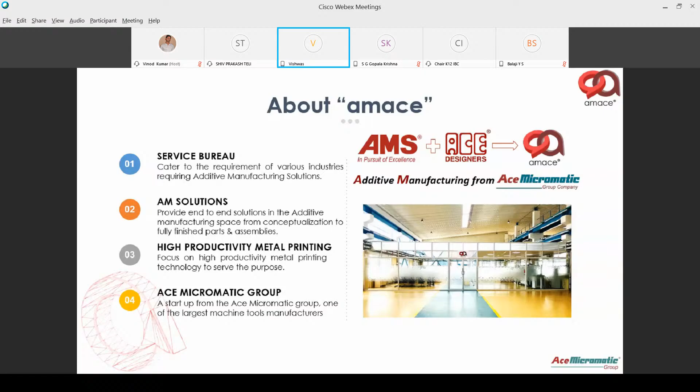Next. So basically, we have seen different types of traditional manufacturing. Just a quick intro on that. We know mostly parts that we use, we feel we see around us are all either casted through a casting process or formed using a press, as you can see there, joined using a welding process, as you've seen, and finally taken up for machining. So this is normally how traditionally any metallic object is done, broadly classified into.

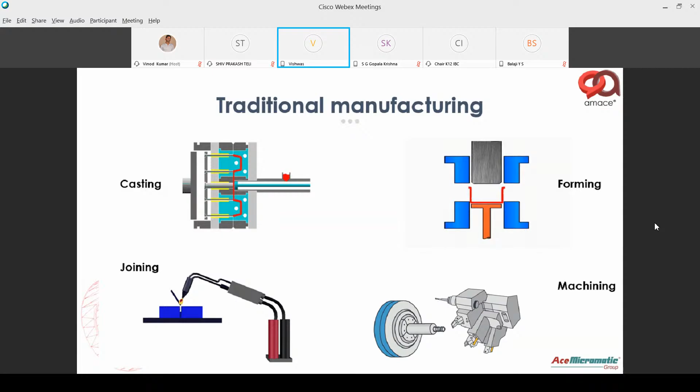But going ahead, in the machining, we have aspects such as turning, milling, drilling, tapping. These are all different processes in subtractive manufacturing. So in the conventional manufacturing process, we call this subtractive manufacturing. I'm sure a lot of us from the mechanical engineering stream would have studied this, used these machines, and actually felt the process. So bulk of the manufacturing today, be it any automotive part, which is especially important in our transmission and movement, are all subjected to these subtractive manufacturing processes where you have material being removed.

So why is it called subtractive? Because material is removed from an existing state. It could be from a casted part or a forged part or even a solid block that is machined. So finally you remove material to get your final part. So that's why it's called subtractive manufacturing.

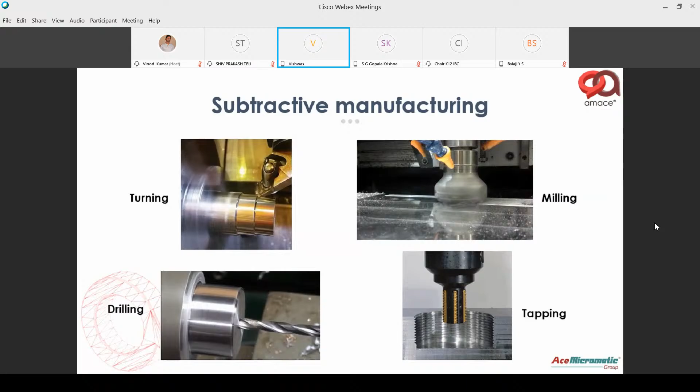On the contrary, additive manufacturing is basically a process where you put material together. So what you see here is a small comparison where in subtractive, you start from a solid block and remove a whole lot of material, and then you finally get your final part. Whereas in additive, you start from a material which is fused either through a heat source or laser or electron beam or a binder. We'll see some of those processes where you basically put the material together just enough to get your final part with very minimum wastage. So that way, this is a very green process. It's a very natural way of doing things.

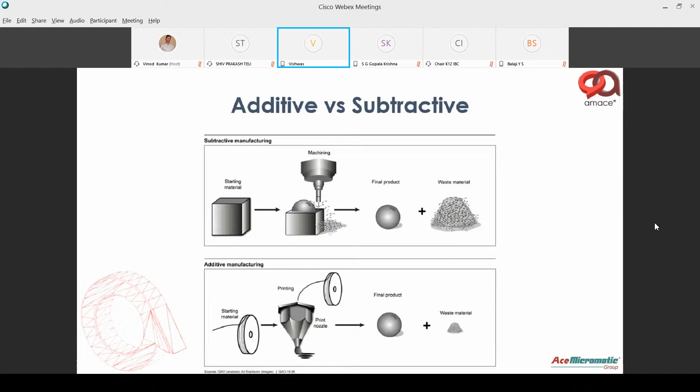Next. So this is an interesting curve which again substantiates the comparison between additive and subtractive. Focus on the x and y axis here. On the x axis we have complexity, and on the y axis we have cost.

So the green line here shows how we would go about costing a part that has to be made conventionally. Conventionally, when the complexity of a part goes up, the cost shoots up drastically. If your part needs a fourth axis machine or a 5-axis machine, the cost shoots up dramatically. Because of this, most designers end up simplifying their part design so complexity reduces. They break the large complex part into smaller pieces that could be machined or manufactured using simpler processes. So this is how conventionally parts are done.

Whereas with 3D printing, complexity is pretty much free, meaning irrespective of how complex a part is, the cost remains the same. The only aspects that decide the cost are the material, the amount of material that goes in, and the volume of the part being printed. So irrespective of complexity, the cost remains the same. You could have a very complex part weighing X grams that's printed, or a simple solid block of X grams printed, and the cost would remain the same.

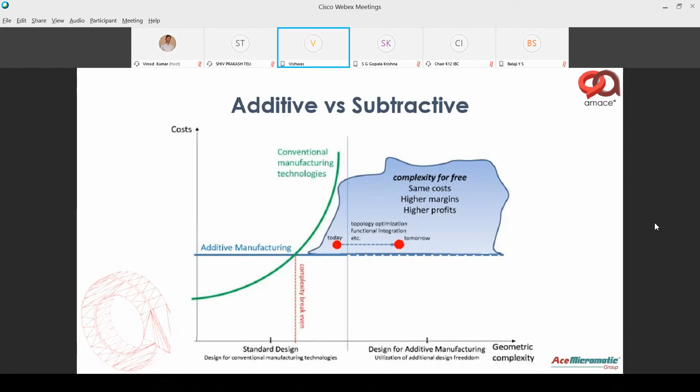So what you see next are the advantages of additive manufacturing. Most of the current manufacturing route is subtractive in nature - whatever we mentioned earlier, automotive, aerospace, medical, any aspect of manufacturing uses subtractive routes. But the natural way of creating any object is the additive way, be it a tree, a bird, an animal, or the human body - all of them are made the additive way. We don't get an arm or a leg that's screwed into us or joined as a separate member and then put together. We're formed the additive way, as a monolith structure, and then we grow internally.

Another advantage is simplified product design. 3D printing allows you to make product design very simple. When you conventionally design any part for a specific application, you always have a constraint from the manufacturing side - either from a casting guy or a forging person telling you this cannot be done, or from a machining person saying I cannot insert a tool to do a hole or mill it at a specific angle, so you'll have to break it into multiple pieces. Or even assembly constraints, because you cannot assemble it together in its current complex state.

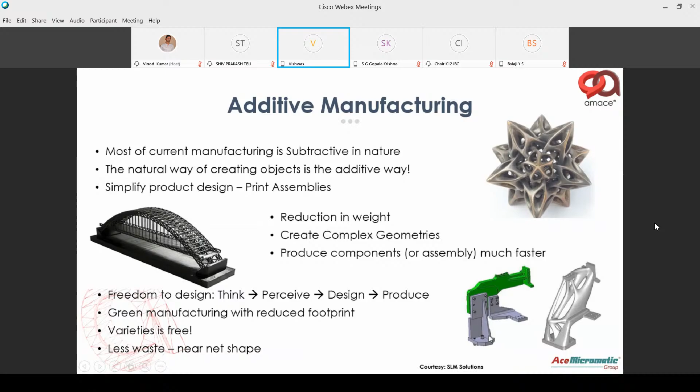Whereas with 3D printing, you can print assemblies, which means you're not worried about how the input processes work - you can directly print assemblies. We'll be looking at some of those examples going ahead. So that's a big advantage.

So you're basically doing something called mass customization. When we say mass customization, you're producing something in high volumes, but they're all customized parts, not necessarily high volumes of identical parts. We all know mass production. Now mass production has become mass customization, wherein you're 3D printing for every specific patient individually, but in high volume. So volumes will remain, but they're all going to be customized.

Similarly, you have prosthetics, orthopedic implants, various medical implants that are happening. Then, of course, what used to happen conventionally in 3D printing was rapid prototyping, where you'd want to get something done in small plastic mainly for visualization purposes. That is happening, that you've seen and known, most of us know about that.

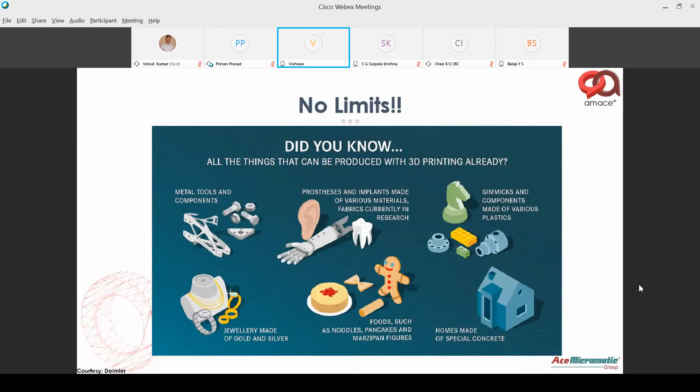Jewelry is another interesting field because you can print them really light. Lightweighting is one of the key applications of 3D printing. So a lot of interesting people have started printing gold and other exotic material where they make it look big and bulky, but it's actually hollow or lightweight from inside. And they can also be made with a very intricate design. So this way, different applications.

Now, going ahead, one of the biggest subjects in additive manufacturing is DFAM. We call it design for additive manufacturing. We've all learned about design for manufacturing, but this is design for additive manufacturing, wherein the subject deals with a lot of optimization, be it weight optimization or topology optimization. It basically means taking a part which you'd want to be printing, where we do a lot of design changes, modify it to make sure you reduce the weight, reduce the unwanted redundant aspects of the part, and make it just enough and suitable for 3D printing.

We'll have a look at some examples going ahead, but another advantage is part consolidation. I explained that today people are 3D printing consolidated parts, which means you could have multiple pieces of individual parts which are all put together as a single assembly and then printed together. Now, this also helps you in direct part replacement, which means where you'd have spare parts and aspects like that, you can reproduce them very quickly and then replace them, which is a big application today.

And of course, we've always known rapid prototyping, where low volumes of prototyping need to be done before any development of maybe an automobile or an aircraft. All of that can be prototyped using 3D printing, which is a key advantage today.

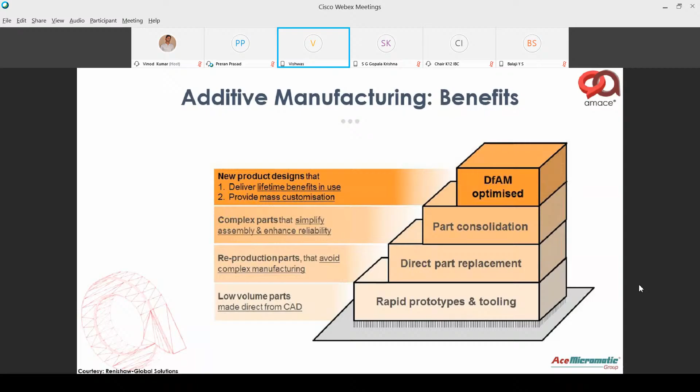Going ahead, normally we classify additive manufacturing or suitability for additive manufacturing based on quantity. Now take an example: say you have a part which is very low volume, say less than 250 — that's just a figure there, but it could be any number based on application. So if it's a low volume and the geometry is machinable, then normally people go for a CNC route. But if the geometry is not machinable, then we suggest just printing those parts because your volumes are too low to even die cast or injection mold, based on what part you're making.

Now, whereas if your parts are high in numbers, where you want high volumes of parts manufactured, and if your geometry is machinable, then you'd go for an investment casting or die casting traditional route. But if your geometry is not machinable, then we'd suggest printing those patterns — your investment casting patterns can be printed using 3D printing, where you could print aluminum or any other material and use them as patterns, so you don't have to actually go and machine it, and use it directly for making your casting.

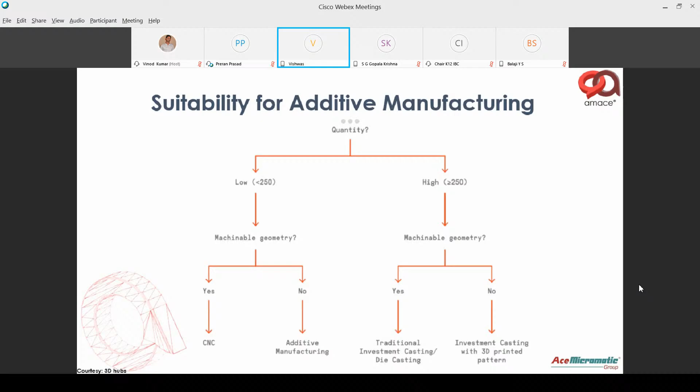So that's basically how we classify from a volume perspective. Going ahead, these are different technologies. We touched upon that. Today we have people printing polymers, sand, metal, ceramics, wax, Kevlar, graphite. People are printing all sorts of exotic materials today for industrial applications, suiting different requirements.

So basically, some of the broader classifications are listed below, say for example based on durability, based on surface finish, based on detailing required for the part, and then application. So the technologies basically show that if you move from a lower durability to a higher durability, a smoother surface finish to a rougher surface finish.

These are all different names given on the right. You can see stereolithography, polymer jetting, binder jetting, fused deposition, laser melting. Some of them are for polymer material, some for metal, some for ceramics, some for a combination today. These are different technologies, and they've been evolving over the past 20, 30 years, and some of them are fairly new, very new.

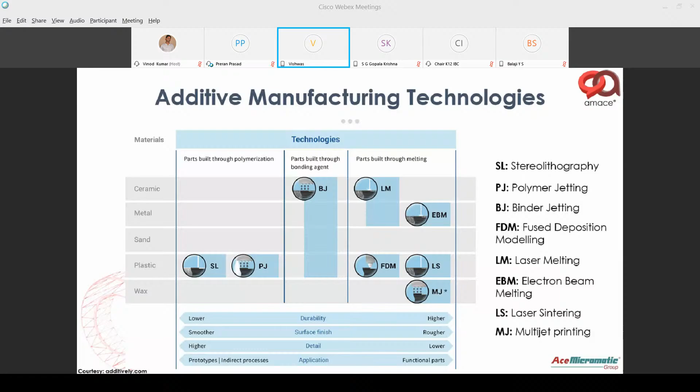So going ahead, you can see the whole process flow of additive manufacturing. What you see on the left side is it all starts with a 3D model. How does this work? So you have a 3D model - anything that has a 3D model, or that can be converted into one, can be 3D printed.

From a 3D model, we go ahead and convert it into a triangulation file. Basically, an STL file is a triangulation file - any part is broken down into triangles from a surface perspective, and then this file is sliced into multiple layers. Each layer's information is passed on to the machine, and each layer is laid one on top of the other to get your final part. That's basically how the whole process works.

Now you can see that happening there. In the fourth step, you have the whole printing process going on. Once that's done, there's a finishing process which we call post-processing. Here we get the end part based on some application, through heat treatment, machining, or other surface treatment processes that we follow to finish the part and give it the final shape and form we want.

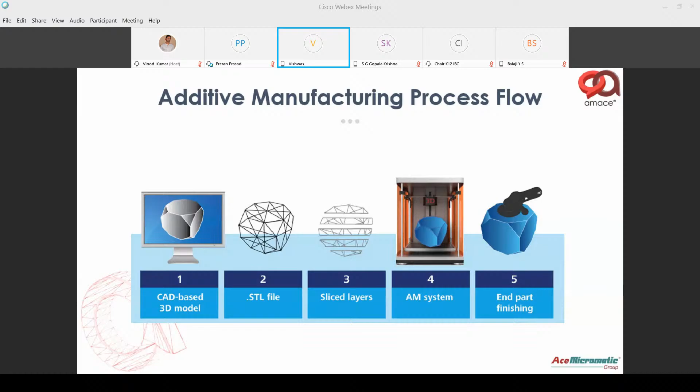So, interestingly, another aspect which is changing in the market is product life cycle. What used to take about 5, 6, 7 years for product development is now shrinking into 1 or 2 years. Take an example of an automobile - a car like the Swift took about 7 or 8 years in its first generation before it underwent a change or modification.

Now it's all happening in about 3 or 4 years. The second version of the Swift came down to about 3 or 4 years, and the next version will go down even further, maybe about 2 years. So people are getting restless - every product is getting obsolete very quickly, be it mobile phones or televisions, because technology is evolving so fast.

Now, one technology really supporting this well is 3D printing, because what would otherwise take many weeks or months to make your first casting part can be printed in a few hours. We've printed parts for automobile manufacturers where otherwise they would have had to cast it in about 2 or 3 months - instead it's all 3D printed in about 2 or 3 weeks, and offered to them for testing. Right now, as we speak, a lot of parts undergoing change are going through this process. In fact, a lot of BS4 to BS6 conversion happened through the 3D printing route for those initial batches when they wanted to test and see the functioning.

So that way, additive manufacturing is the most suitable process for supporting this technology.

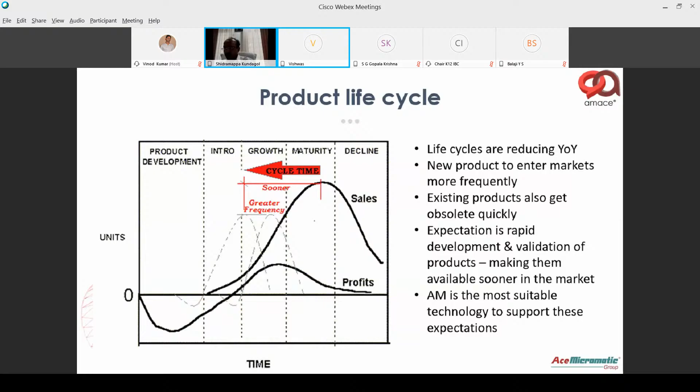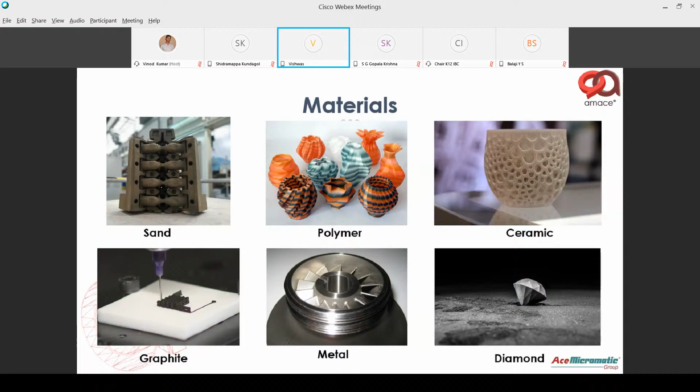We'll focus our presentation going ahead a little on metals, so you'll see a little more cases of metals going ahead. Next, so you can see this here.

This is a technology called laser powder bed fusion. If you actually see, most of the metals being 3D printed today use this powder bed fusion technology. What happens here is material in the form of metal powder is laid on a plate, as you can see on the top image being pointed. It's laid like this, and then you have a laser which comes and melts that powder, and it fuses to the previous layer. So the previously melted part is fused to the new layer of powder.

As every layer is completed, the platform goes down on which this is printed, and the next layer of powder is laid. On the left side, the blue image shows you multiple layers of powder which were fused to form the part, sitting in the middle of a big cake of powder. This layer of powder could be anywhere between 30 to 100 microns thick to get your part, which is finally almost finished.

So this is basically how it happens. The power source could be either laser or electron beam. What you see on top is basically a laser beam which is deflected by a mirror - a 2-axis mirror which deflects the laser beam very selectively and accurately at a specific spot, and then melts the powder and fuses it to the previous layer.

This is very similar to a micro welding process, so any material that can be welded can be 3D printed. Imagine you have heard of laser welding - this is very similar to that, but happening at a micron level, very fine level. That way you get your accurate part with very few defects on it.

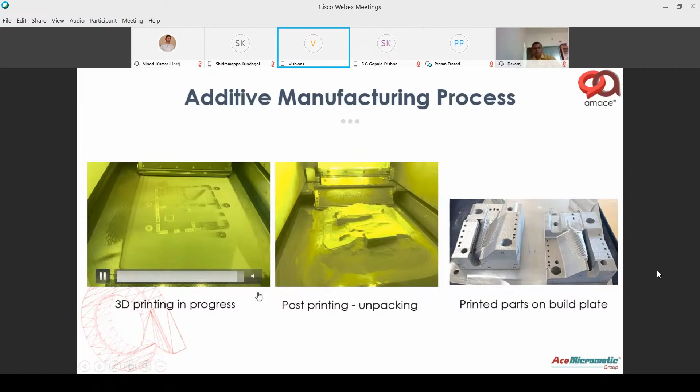Going ahead, next. In this whole process, what you've seen in the metal 3D printing process, we discussed powder bed fusion, PBF. As I explained, about 75% of the printing happening in metal uses the powder bed fusion technology.

The other one is DED, which is direct energy deposition or direct metal deposition. In this case, a metal is fused through a coaxial laser and metal jet. A powder metal is sprayed using a nozzle onto a plate. Basically, this is similar to 5-axis machining - if you've seen 5-axis machining, you can imagine instead of the spindle which is cutting material, you have a nozzled body which is spraying metal and laser surrounding it.

So basically, the laser melts the powder wherever it's being sprayed on. This way you can print parts of any shape and size as required in this whole technology.

And the third one is the new one, called binder jetting, which I explained some time back. It's an interesting field where you have a binder, which is more like a glue, sprayed on selectively in areas where you'd want the bonding to happen. Then the next layer of powder is laid, and again the binder is sprayed.

So at the end of the whole process, you get a big cake of a part which is in its green stage, just glued together, and that will have to be subjected to a sintering process. Basically, it's put into an oven which will melt the whole part and fuse them together. Then finally a debinding process removes the binder, and then you have your final part ready.

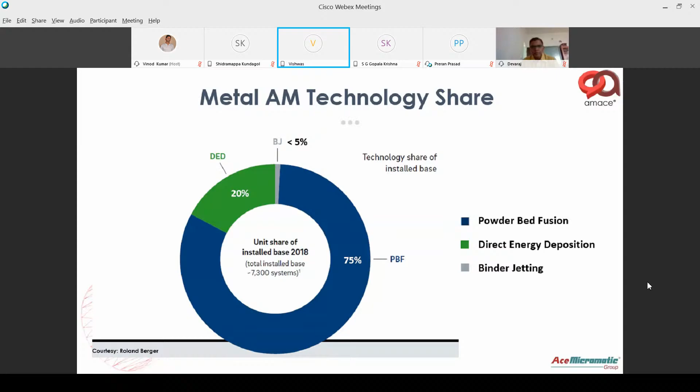This is one of the newer technologies, which has come in the past 5-6 years, but it's at a very nascent stage. This slide shows you about surface finish.

On the left side you see a very coarse thickness, imagine an 80 micron layer thickness. When you want a part printed fast, we end up choosing a coarse thickness. This has the advantage of printing faster, so you get your final part much sooner, and it's an economical approach.

But the problem is the surface finish is very poor. You don't get a very finished part, so you'll have to probably subject it to some post-processing or finishing machining.

On the right side, you see a thin layer thickness, say 30 micron. Here the printing is slow, but it's almost ready to use in its final shape. It may be a little more expensive, because you'll be taking longer to print, and time is what decides the cost.

But you also have the option of printing it in hybrid, shown in the middle, where you have coarser areas that don't need too much finesse. You could print those in larger thickness, and then when you have finer aspects, you can print in lower thickness.

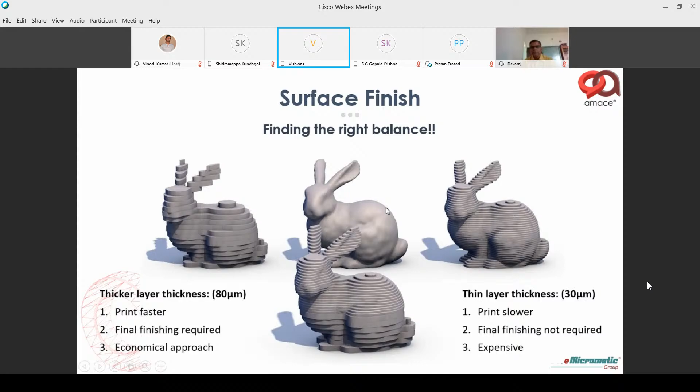Eventually you'd want a surface finish as shown in the image at the back, a smoother surface finish, achievable through post-processing. So it's all about finding the right balance.

So we explained about design for additive manufacturing. We'll quickly run through this. Basically, this is a science where, as designers, we can sit and understand, apply a lot of AM techniques to find out how to make parts more suitable for its application.

You can create intricate shapes and produce them with lighter material. If people who've used ANSYS, which you'd use to simulate weight optimization, ask based on certain conditions, ANSYS to throw out the most optimum structure, it normally gives a structure which is in a bionic form, very weird in shape and size.

So what we end up doing is adding a lot of material to make it suitable for manufacturing. Though it gives out a very weird shape and structure, we end up adding a lot of redundant material, hence over-designing, to make it manufacturable.

Whereas with 3D printing, we have an advantage, as you can see in the images in between. A lot of analysis is done. On the extreme end, you have a solid block of a bracket which is designed, going through multiple rounds of iterations of analysis and simulation, which finally tells you that you need material only in these areas for the kind of strength and load you've actually asked for.

That ends up deciding how the shape and size should be, and that can be directly taken onto a 3D printer and printed and used for its final application. This way you save not only material but also a whole lot of time in manufacturing compared to the conventional way. So there are a lot of advantages, and design for additive manufacturing is a very important subject.

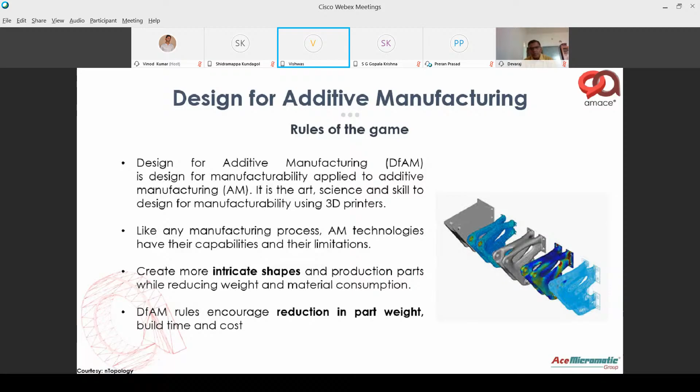Fantastic softwares are being made available. Almost all software manufacturers today are gearing up for this, where they're taking you from seamless integration, design, simulation, analysis, manufacturing. All these are being done on a single platform, which earlier used to be done on different tools. Going ahead, you'll see some more examples of DFAM.

You can see this part here. This was basically a bracket for Airbus. An existing part used to be big and bulky like this, still an aerospace part which is quite light conventionally compared. When you did a topology optimization, you ended up getting a part which is seen on the right side. So this is actually a part which has been put to test and been used.

So where you apply topology optimization, one of the biggest areas of AM where applications being used is aerospace. You can see some of the advantages are very little wastage. You have a lot of cost saving when you have exotic material like titanium and others which cost a lot of money. If you've seen aerospace parts, when you print, about 95% of the material is scooped out, and finally you get a very lightweight structure.

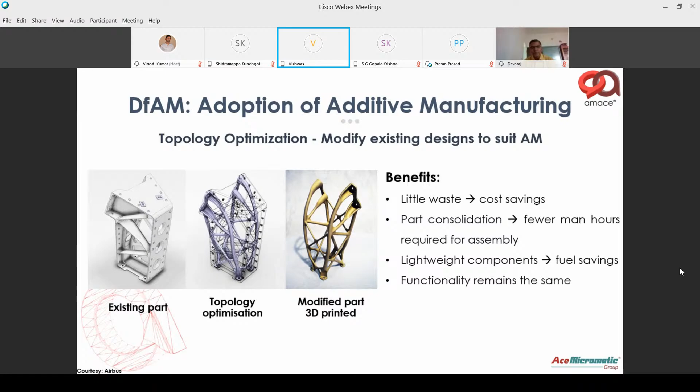So you put a solid block and get a very thin structure which comes out. Here you can print that directly. That's the advantage. Part consolidation, we'll look at that going ahead. So you basically can print multiple parts together.

So here's another interesting example where you have an electric vehicle motor housing, which is 3D printed. As sir rightly pointed out, electric vehicles also are hard pressed for weight. Today, if you can make a motorcycle or a scooter which is 3D printed, which is an electric vehicle, if it has a mileage of say 70 kilometers per full charge of battery, and if you can make it a little lighter, maybe you can push it to 80 kilometers. So that way, it's a huge USP for these automobile manufacturers.

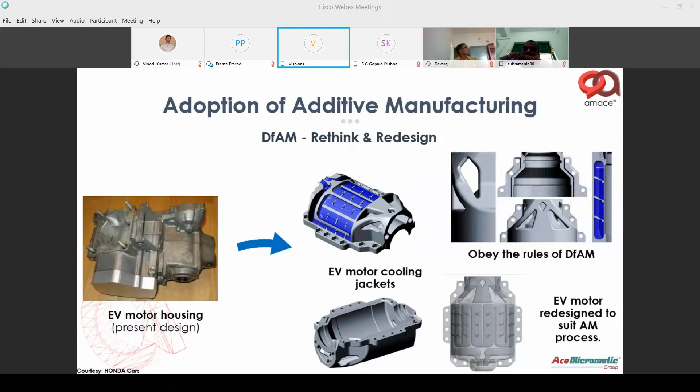So lighter automobiles are the order of the day, so that's where you have a lot of people working towards that. People like Ather and many others have already started exploring printing parts of polymers and making them lighter. Going ahead, you'll see another interesting aspect of 3D printing: not everything that we tell as an advantage of 3D printing is applicable.

So there are aspects which we need to follow in terms of making it suitable for printing. So not all parts are ready for 3D printing. There is something called supports that get printed along with the part that is actually required. Any part which has an overhang needs to be supported from the base plate. This is basically similar to a structure that you're building where you have overhanging scaffolds which need to be supported. Otherwise, you'll end up dropping it down or deforming or warping the part.

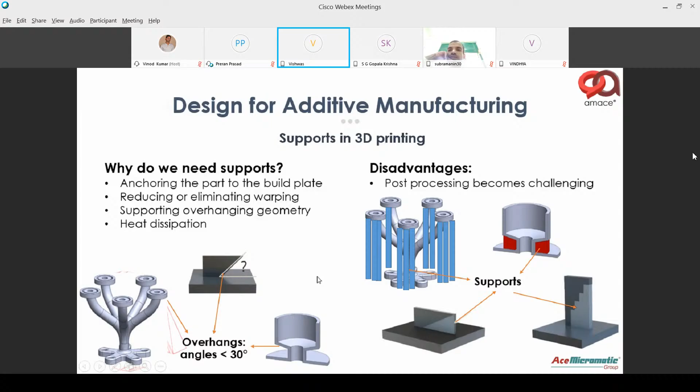So you see these images here, which shows you where supports are provided. The red one and the blue one are basically supports required to support that overhanging structure. Now, this can be overcome by doing a small design change, which is also a part of design for additive manufacturing. By doing a small modification called a self-supporting structure or self-supporting profile, where we went about modifying a flat surface on the previous image by giving a small angled material that ends up making it self-supporting. This allows parts to be printed without support. So all this is also a part of design for additive manufacturing.

And also you have cooling channels when you're making molds, which we'll see in a bit. Design for these will also be better when you go for a larger size. You'd have to use a different channel, like a self-supporting profile, when you want to make holes larger than a specific size that is dictated by the process.

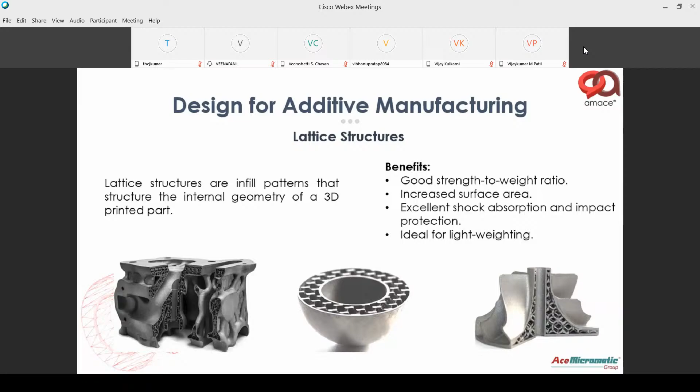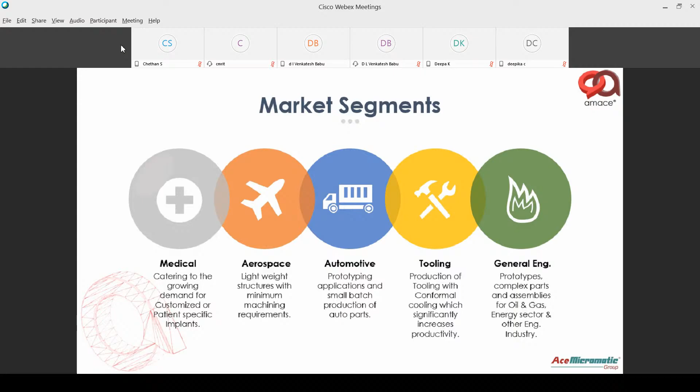So what you see next is market segments. Today there are different markets who have adopted 3D printing: medical, aerospace, automobile, tooling, die industry, and engineering. We'll look at some of them.

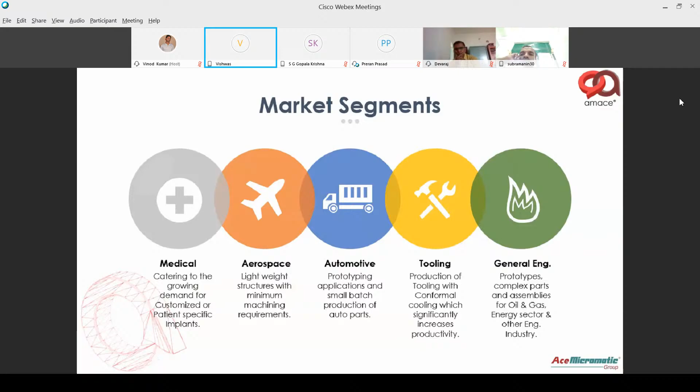In the medical industry, one of the most popular aspects is medical implants. What you see on the left are cranioplast implants, basically a portion of your skull, maxillofacial implants, your face implants, and mandibular implants, which is basically the jawbone. All these are being 3D printed today.

Today, when a person meets with an accident and the doctor declares bone loss, there are two choices. They can choose a standard generic implant, more like a fixed size of shirt, say 40, 42, 44 size, or it could be a custom implant suiting the design of the particular patient, made and supplied to the patient in a very short time. Basically a CT scan or an MRI scan file is required as an input, and that is used to print this part and supply it to the patient.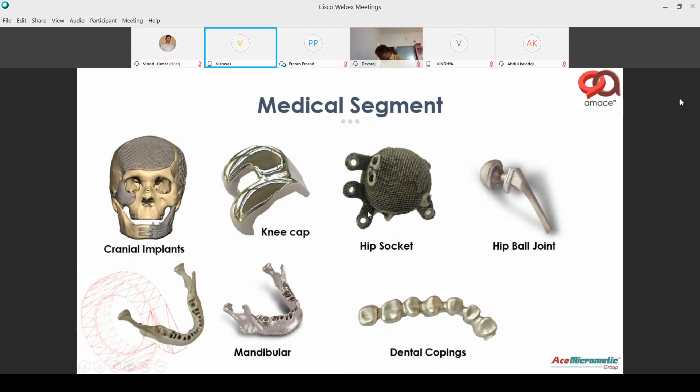Similarly, you have hip sockets, dental copings, knee joints, hip joints, acetabular cups. All these are being printed today, very specific to a patient's shape and size. Going ahead, a lot of medical implants are going to be done not only globally but even in India. There's a big adoption of 3D printing, and the niche areas could be cranials, hip implants, and other orthopedic implants.

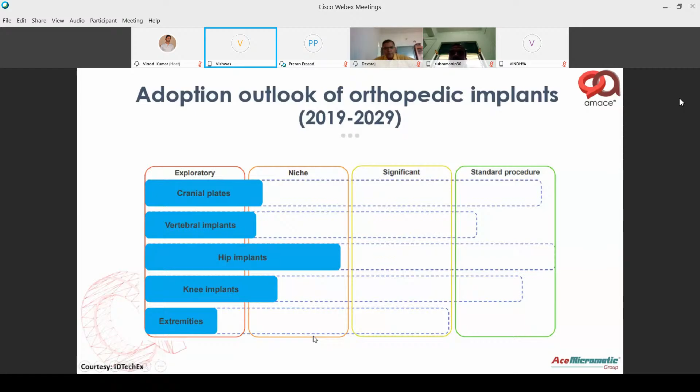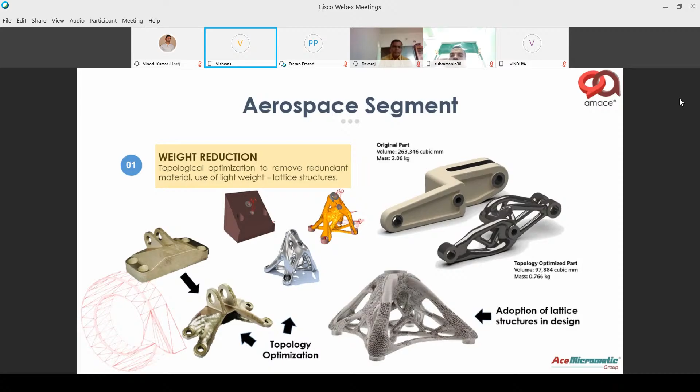As we speak now, this is not just in prototyping, but has already gotten into the production stage. There are more than 50,000 of these nozzles already flying on GE engines. Every GE engine has about 4 of these nozzles, so an aircraft with 2 or 4 engines would have multiple of those fuel nozzles.

Now, as designers, we all know, as and when you have more parts, more the reliability issue. You have every joint poses your stack up tolerance issue, and this overcomes that by integrating multiple of these parts. That's the advantage which is coming up especially in aerospace.

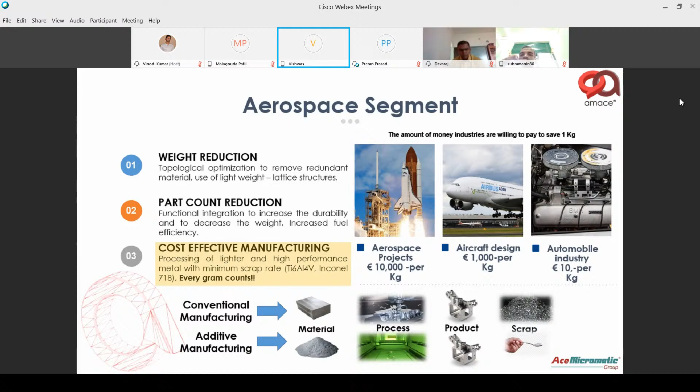And lastly, we have on-demand manufacturing. This is an interesting area which is coming up not only for aerospace but also for automotive. What is interesting here is we have a lot of manufacturers such as Daimler and others who have a commitment to their customers, telling they will stock spare parts on account of the customers as long as the vehicle is being put to use. For example, a person can be running a Daimler truck or a Mercedes-Benz car which is 20 years old.

But Mercedes has committed, telling we will keep the spare parts on your behalf. Now, because of this, they have billions and billions of euros worth of spare parts, which is getting wasted. And that's a lot of money. So instead, the decision they've taken going ahead in the near future, which they've already started, is they will only keep 3D design, 3D model of the parts.

And when there's a requirement, say, for example, in Mysore, the local service center will be sent the 3D model and they can get it 3D printed. Even if it's going to cost 10 times the cost, it's okay, because you've saved up the cost of keeping inventory of those parts and waiting for nearly a month to get it from some corner of Germany into Mysore, which would take a lot of time and effort. And that can be saved by 3D printing locally.

So this way, on-demand manufacturing, only when there is a demand for a part or a spare part, it will be manufactured in very short time. That's picking up not only in aerospace, but also in automotive.

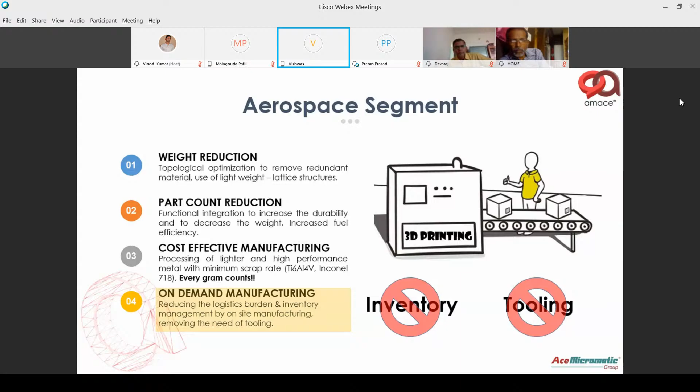So gone are the days when 3D printing can be considered as just a prototyping or sampling process for visualization or validation, but it's actually gone into full production. You all know any aerospace part needs a very, very solid airworthiness certification, which means it has to be proved that it's really worthy of flying for many years.

So this has been going on for past many years. In fact, for the past 5 to 8 years, the validations have been going on. That's why the adaptation has been low in the past, but now you'll see rampant adaptation of these technologies in industrial areas.

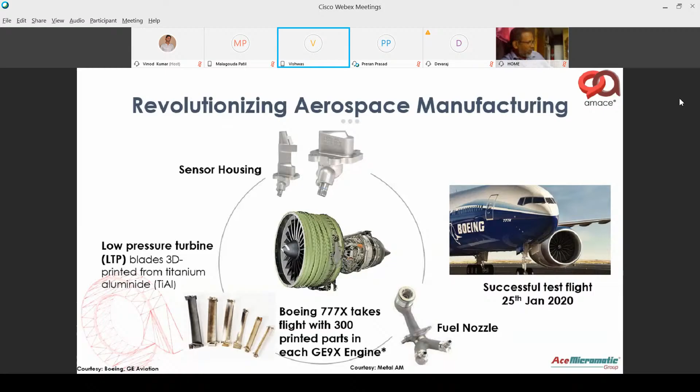So this is going to be the future for aerospace and other aircraft. You'll see in the next slide what the plan is for the aerospace industry. By 2030, we'll be looking at AM designed airframes, which means not only are we looking at small parts of the aircrafts, but the aircrafts will be designed to suit the 3D printing process.

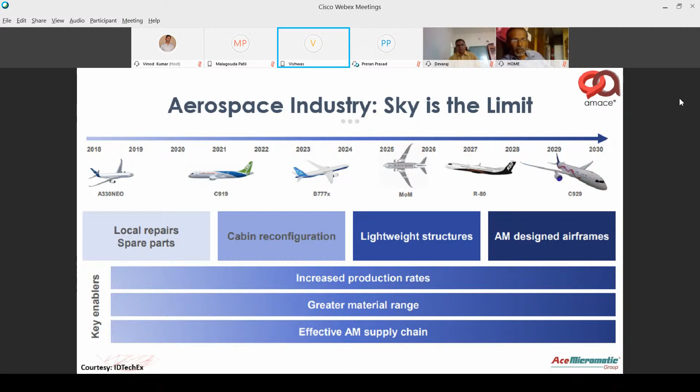They will keep only 3D printing or additive manufacturing in mind to make aircrafts. So this way, maybe aircrafts will have enough fuel. They'll be able to carry enough fuel to fly from maybe Bangalore to Las Vegas or Los Angeles non-stop, which probably today is not possible. So a 20-25 hour flight should be very straightforward in the next few years' time. That's the beauty of aerospace.

Now, in the automotive segment, we've known rapid prototyping. That's been there for a long time. It's been quite popular. People have been using it to validate, visualize their designs very quickly. But another advantage is generative design. We'll have a look at that in the next slide. Basically, it's all about designing and printing to validate your design to make sure it actually works instead of doing it on a simulated platform.

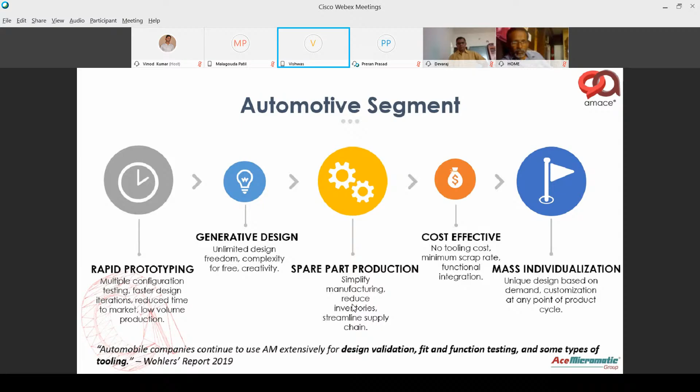We discussed spare parts manufacturing. So we'll look at the next slides, which give you examples of 3D printed parts. On the left side, you can see Bugatti printing some of their parts for their special cars using this SLM technology, or selective laser melting technology.

As I explained in the product lifecycle slide, 5 to 6 years is what it used to take to develop a car, which means as we speak, they're developing an automobile to come out in 2025 or 26. Now that is changing because technology is modifying so quickly that people cannot afford to wait 5 to 6 years. People are expecting things to come out in 2 or 3 years' time, so 3D printing is the right route being adapted by many manufacturers.

You can see on the right side here a small engine block which would conventionally take about 4 to 6 weeks. This was printed by us in 48 hours. Just an example to show how time is everything, and how it's being shrunk by a process like AM.

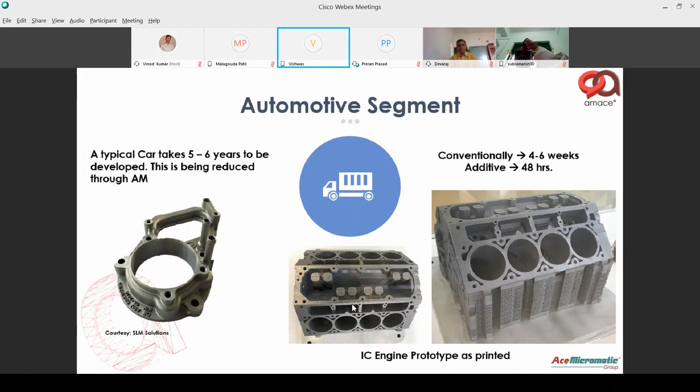Next, what you see is the generative design concept. This is basically a seat belt assembly by General Motors for one of their next-gen cars. When they sat to design, they found multiple design concepts, and finally chose one after 3D printing and actually putting it to test.

They printed the whole assembly, multiple of them, because as I said, variety is free in 3D printing. You could print 15 different varieties of a part weighing almost the same, or print one variety 15 different times. They'll all be the same cost. So people are putting actual designs into use and then validating them for themselves.

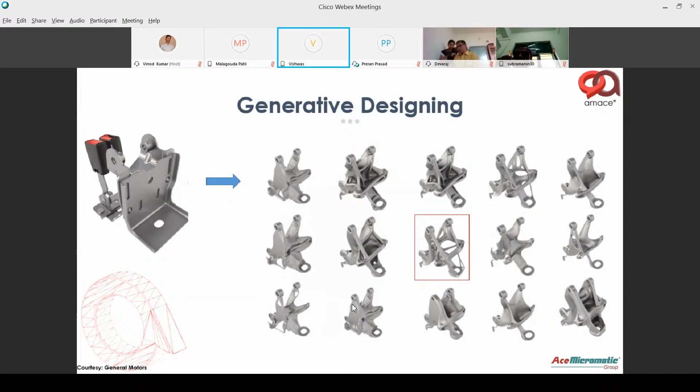That's generative design. You'll see this interestingly in the next slide: 8 individual pieces were put together in this assembly to make a single piece, which this way was not only lighter but also stronger. That's the beauty of DFAM and also 3D printing.

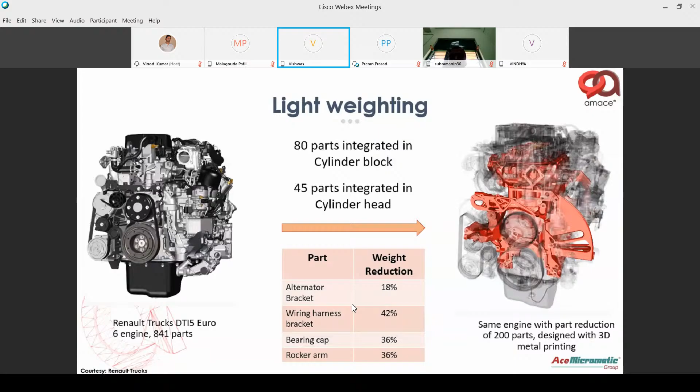That was automotive. This is just a summary of the whole thing. We have Renault, where we'll see a small video of 200 different parts of an engine from a Euro 6 engine being printed, where 841 parts were brought down to fewer numbers. They used 3D printing here not only to reduce the number of parts but also for weight reduction. We'll just have a look at a short video showing this whole process.

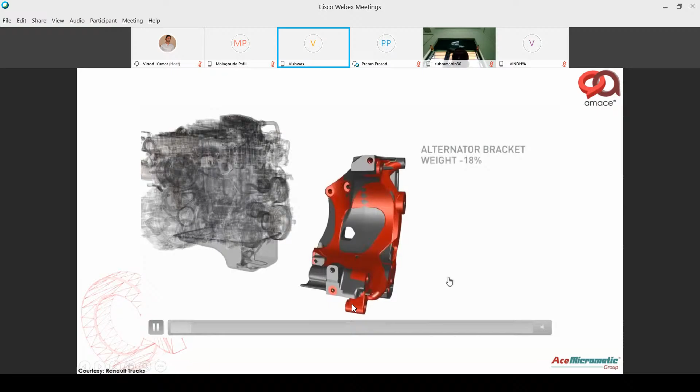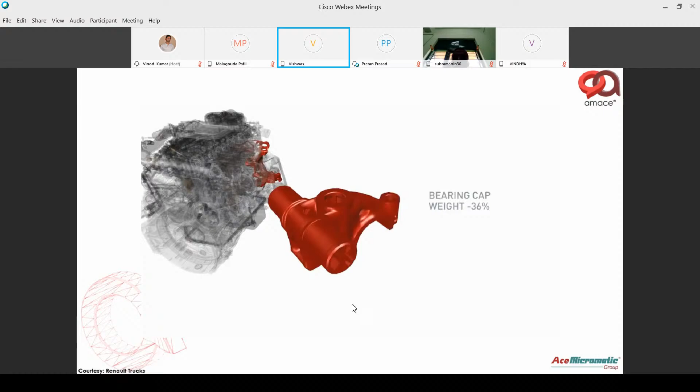You can see here the original design was taken, and a lot of DFAM techniques were applied, modified, and made lightweight—42% lighter. Take a rocker assembly bearing cap, make it lighter, and multiple of them got printed and put into this. A rocker arm, 36% lighter, multiple of them again put back in.

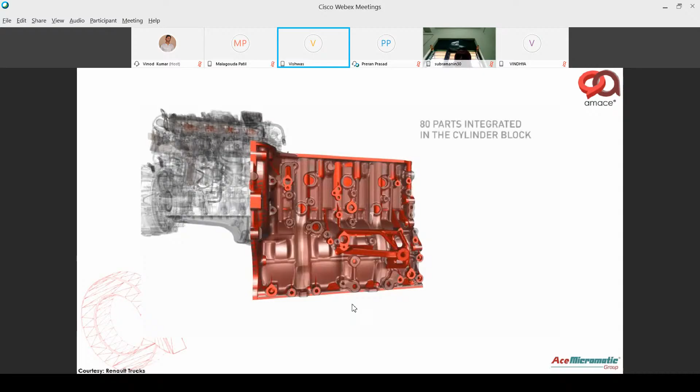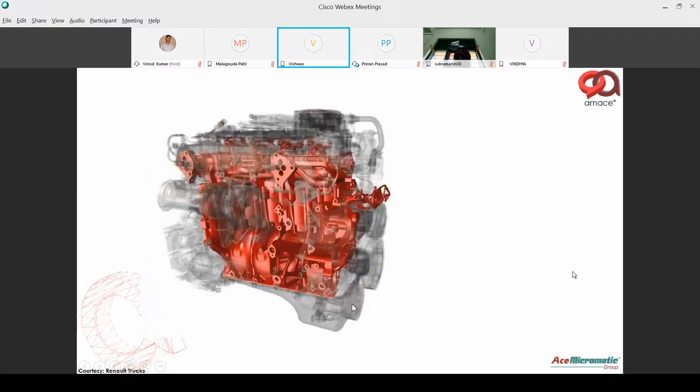Take an engine cylinder head, cylinder block—80 parts were integrated, meaning runners, nut runners, and a whole lot of other things got integrated together. Parts got integrated—45 parts got integrated into the cylinder head, which otherwise would have been individual pieces. So your 841 piece assembly got down to 200 parts fewer. Your BOM, or bill of material, got reduced, and finally the whole assembly became faster. That's basically the whole show.

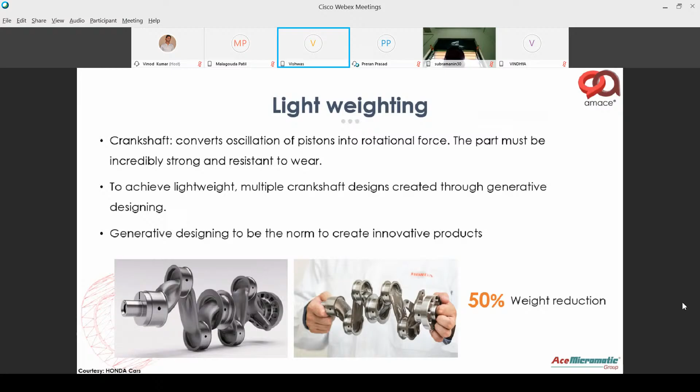Similarly, Honda has done a lot of lightweighting on their crankshafts, which are made lighter and better. Different automobile manufacturers are working on it. Even in India, Bajaj and many other automobile manufacturers have gotten into it.

Now, this is another interesting case where you can see the lattice structures. As I explained, people have been trying out different parts. It may be costly today, but they all know it's only a matter of time before this technology takes over the conventional way. So people don't want to start learning late—they want to invest time, effort, and money in learning the process, adapting, and finding suitability for their application. Finally, when the technology really booms, they'll all be ready with solutions and adapt it very easily.

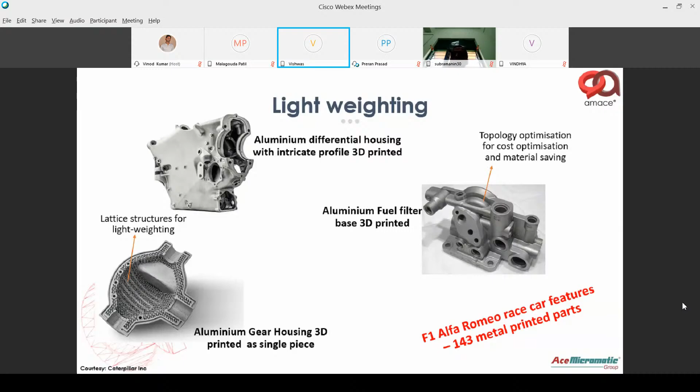So in this case, you can see F1 Alfa Romeo cars have about 143 metal parts which are being 3D printed and integrated into their racing cars. So like this, almost every industry with niche applications is using this.

We discussed on-demand spare parts. We can skip this—any remote location spares can be made available through 3D printing.

Another interesting application is tooling, which basically means plastic injection molding or any other molding process. Conventionally, the molding process has about 65% of its time as cooling time, because any injection molded plastic part needs so much cooling—if you try ejecting it out faster, you'll end up warping the plastic and spoiling the whole part. So they end up cooling it naturally.

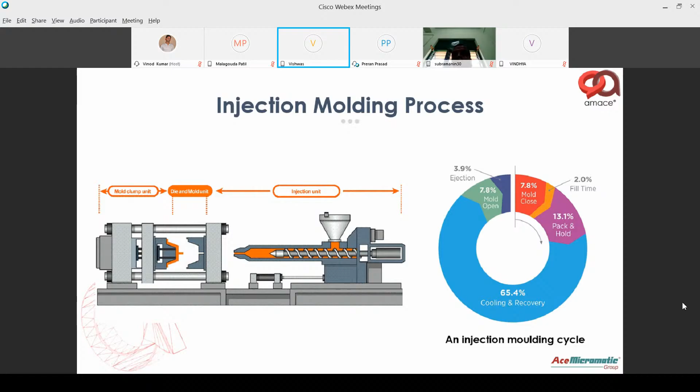Now, in the next slide, what you see is this mold on the left side. This shows how cooling is done, where they have a straight drilled hole, called a rectilinear hole, through which cooling water is passed to cool it. On the right side, you see a conformal cooling channel, which takes the shape and size of the part itself, giving much better and more uniform cooling, making it much faster.

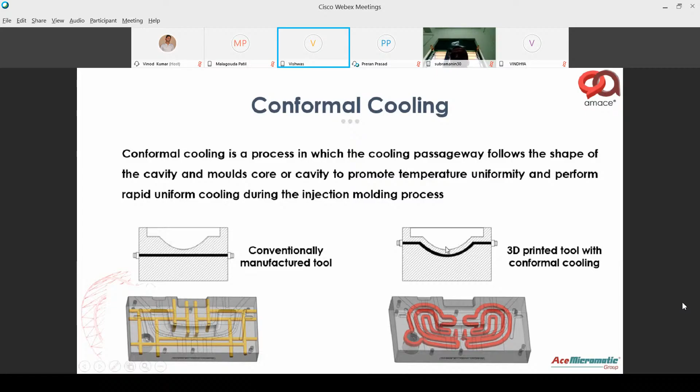So through 3D printing, we can achieve this. All the aspects you see on the right side, which cannot be drilled conventionally in such shapes, can only be done through 3D printing. We've done a lot of molds where 3D printed molds have shown a lot of improvement—either in warpage, removing air traps, or getting better surface finish of injection molded parts. This is one of the key advantages.

You can see this warpage on the right side, where the part gets twisted, or when removed, it doesn't give the actual form or shape required. That is mainly because of non-uniform temperature distribution.

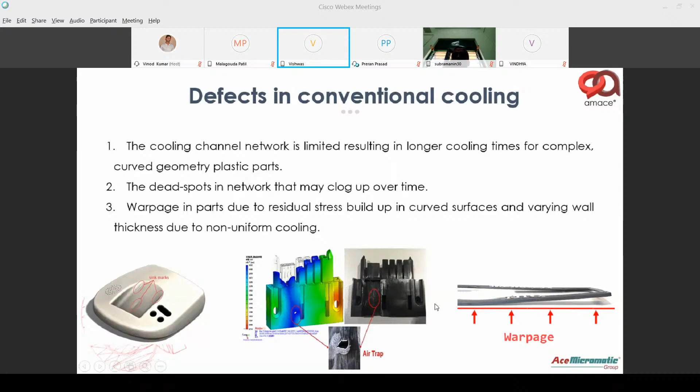In the next slide, you'll see uniform temperature distribution because of 3D printing. On the left side, the red zone is due to non-uniform temperature distribution, since conventional cooling only achieves limited cooling. On the right side, the conformal cooled channel lets cooling water go through all the heat zones where molten plastic injection happens, giving uniform temperature distribution as shown in the thermal graph. This lets you eject the part much faster—we've seen 30-40% improvement in cycle time using conformal cooling channels.

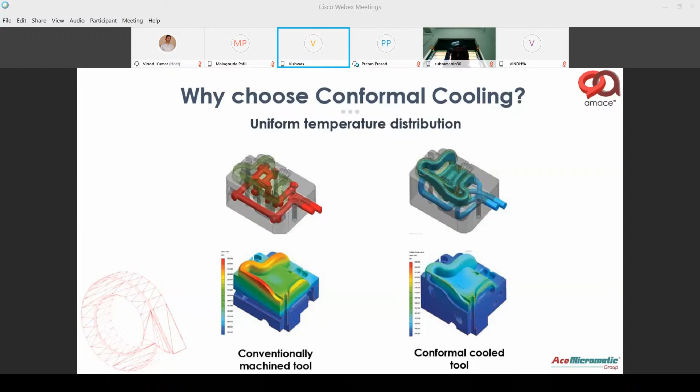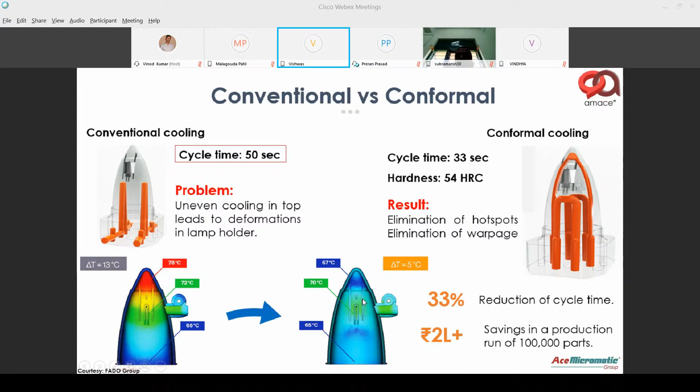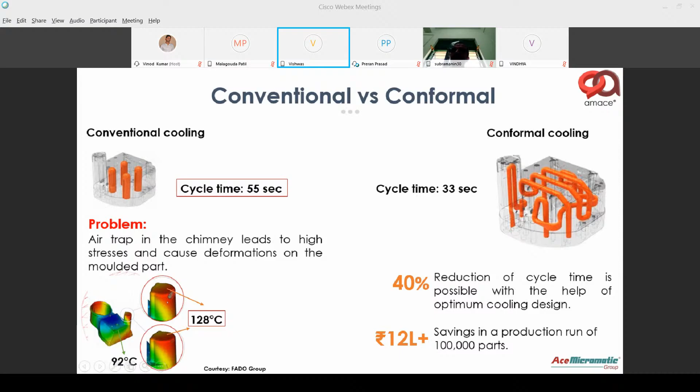These are some more examples. What used to take 50 seconds on the left side using the conventional way got reduced to about 33 seconds, saving about 2 lakh rupees. Next, you'll see something similar where customers saved about 40% in time, again because of conformal cooling, and here about 12 lakh rupees was saved again due to uniform temperature distribution. So it's a big advantage.

Going ahead, even in foundry applications, what we've seen is patterns. As I explained initially, 3D printed patterns are one of the biggest advantages—you can print these patterns and directly take them to casting, making it much faster and more advantageous in terms of complexity. This is what they call the Digital Foundry, another interesting subject.

From an engineering perspective, today people are printing different sorts of parts for pumps, valves, and hydraulic manifold blocks. Jewelry is being printed, gear assemblies are being printed. Even in the engineering space, a lot of work is going on using the 3D printed route.

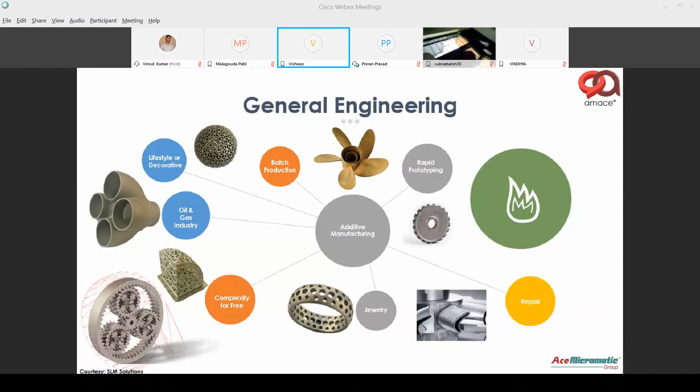So what does the future have in store for us? As I explained, mass customization—what used to involve a customer interacting through a lot of retail sources—is being converted, where customization happens to ensure every person gets what is specifically required for them. In the shoe space, companies like Nike and Adidas already have the sole of the shoe being 3D printed specific to a person's foot size and shape.

So instead of choosing a 9, 10, or 11 size without knowing what type of foot you have, today you'll be made to walk or run on a treadmill watched by a camera which can see your foot profile. It's called gait analysis, and that is mapped to define what sort of pressures are being applied on your foot from the bottom.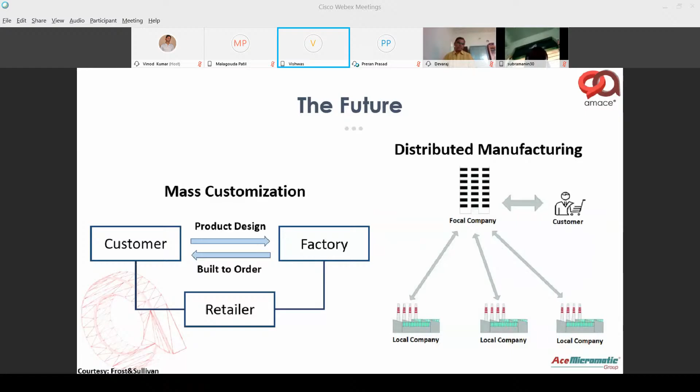And a foot insole is made very specific to your size and shape, and this is made in large volume. A lot of people have been working on this kind of customization. Remember this word: mass customization, where high volumes of parts are made, but each specific to a particular customer. So automobiles may also change to a specific taste of a customer going ahead.

There'll be a lot of distributed manufacturing going ahead too. Future supply chains are going to look something like this. Current traditional manufacturing follows a whole lot of indirect route, where manufacturers route through wholesalers and retailers before it reaches a customer. Whereas in additive manufacturing, someone could approach the manufacturer directly and it could be made available. So basically, it's moving from a B2B space to a B2C space, where a direct consumer can talk to the manufacturer.

Like I said, you have service bureaus like ours, where people can walk in and say, look, I need a part of this particular size or shape to be made, and it can be made available in a few hours' time. So a lot of project works and many others are being made through 3D printing.

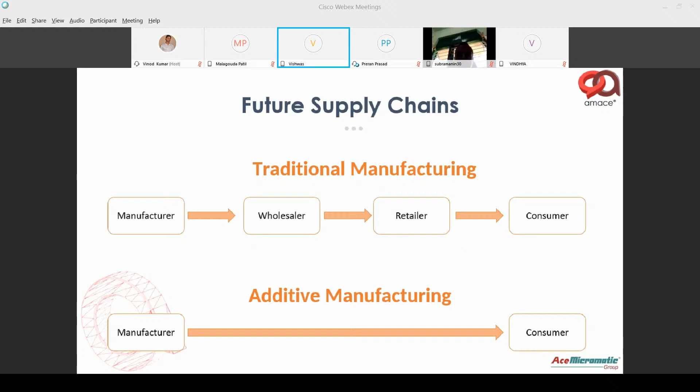So the future, as this topic is rightly aimed at, is going to be a big blend of Industry 4.0, where you have a lot of augmented reality, virtual reality, and people sitting in America sending a program which has to be printed maybe in the smallest village of India or even Africa.

They'll be controlling it through a digital platform where everything will be uploaded to the cloud. All data will be available, and then someone will manufacture it automatically, and then it comes out and gets dispatched to maybe someone in Europe. So the whole science is going to get changed. It's going to be a global village where people are going to have access from different parts of the world, sitting anywhere, trying to reach out and manufacture something and distribute it and make it happen.

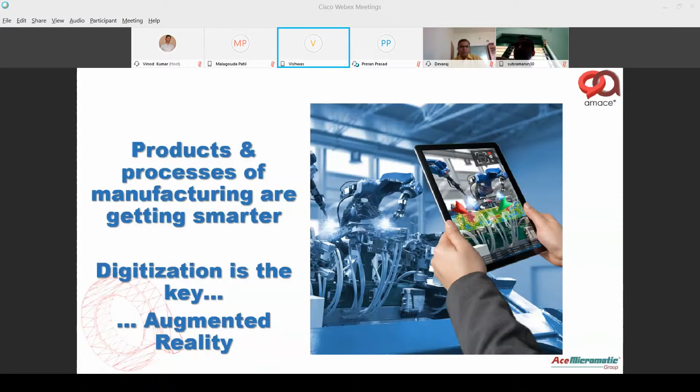So it's all going to change going ahead. It will not be the conventional way of doing things like we have been doing. That's the beauty, and one of the technologies which fits in well is additive manufacturing.

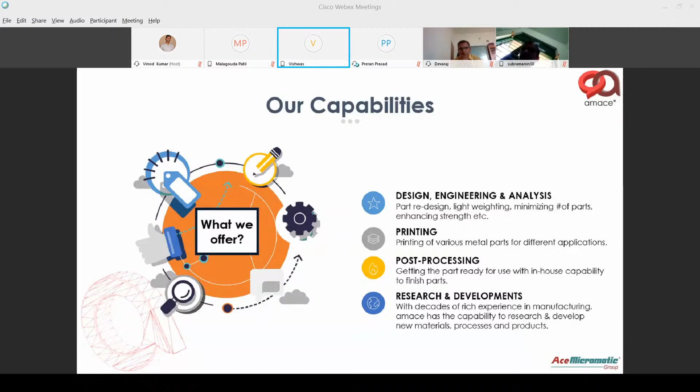So that's us. We basically, as I said, AMACE Solutions, offer design, engineering, and analysis solutions. We print different parts in metal. We offer post-processing, finishing the parts to suit the application or requirement. We do a lot of R&D in terms of developing parameters and materials, and how we do it. Going ahead, we'll see a few quick examples of what we've done.

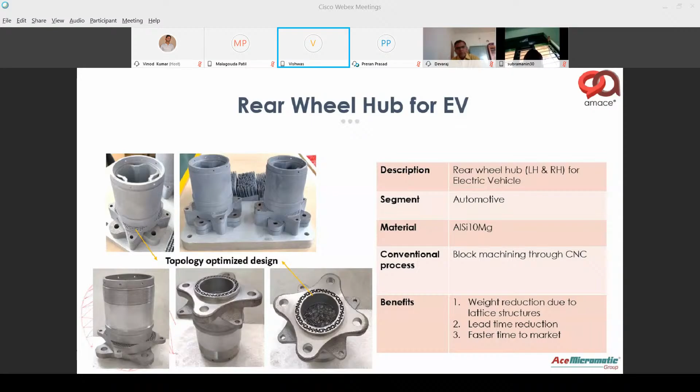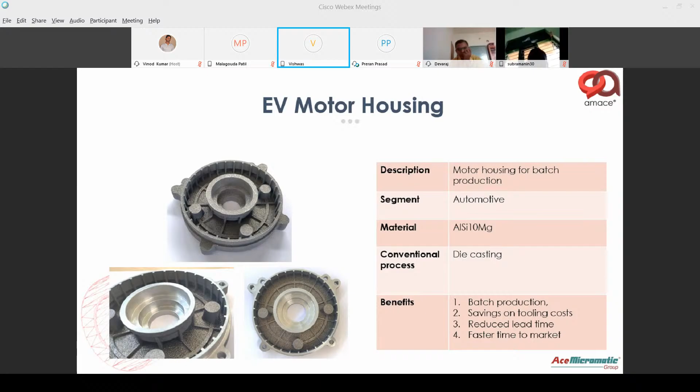Next, this was again for an electric motor. This is basically a motor manufacturer who was making motors for EVs, and in this case a lot of lightweighting was done - you can see where those ribs are. Conventionally it used to have a lot of solid material, but it was made suitable for 3D printing. Conventionally we used to follow a die casting route, but with 3D printing they were able to achieve it in a very short time. We also machined this part and gave it to them.

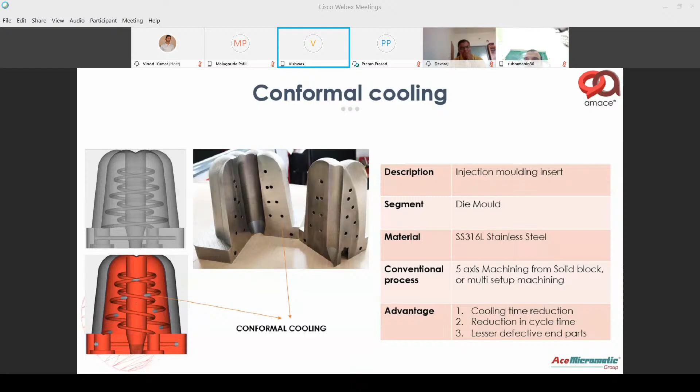You can see this here. This is basically a mold of a plastic injection molded part where you can have these curvilinear holes that go in a circular way and then cool the whole block uniformly without having to go through a very cumbersome process. This is done through 3D printing, and a cut section is shown to you in the model.

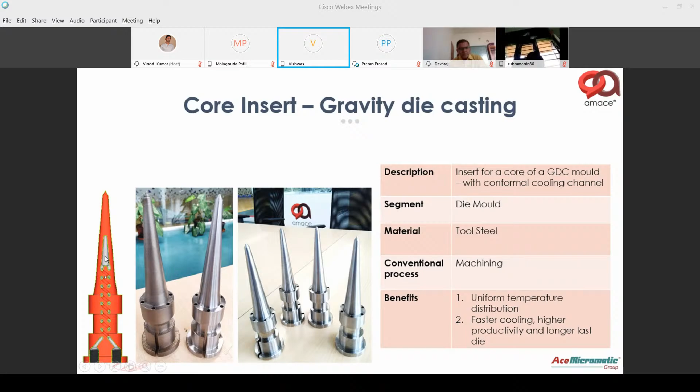This was a die casting application that we did for a TVS group company, where on the left side you have these channels which go all the way up and then bring down. In this case, the customer's goal was better surface finish because of uniform temperature distribution, where you have a cooling liquid which goes all the way up and brings it down.

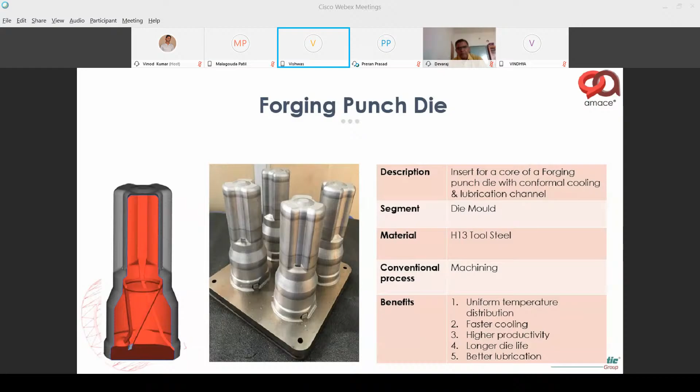Similarly, another application for a forging process where you have material, basically a graphite lubricant, which got sprayed through the small vents that came out of this forge punch, which we were able to do. This is still under testing and development. Once this gets done, we'll probably be able to do more in the forging space.

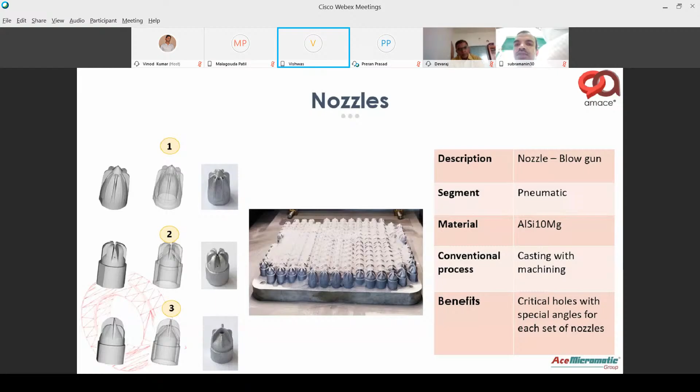Next, these are some of the nozzles. I explained to you variety is free. In 3D printing, as I explained, you can see more than 8 different varieties of nozzles were printed, all at the same cost. This customer was using it for a spraying application and found it quite helpful. Now they've gone from prototyping to batch production to mass production, ordering these nozzles made in high volumes, each of a different design suiting a different purpose and application, made very cost effectively through 3D printing.

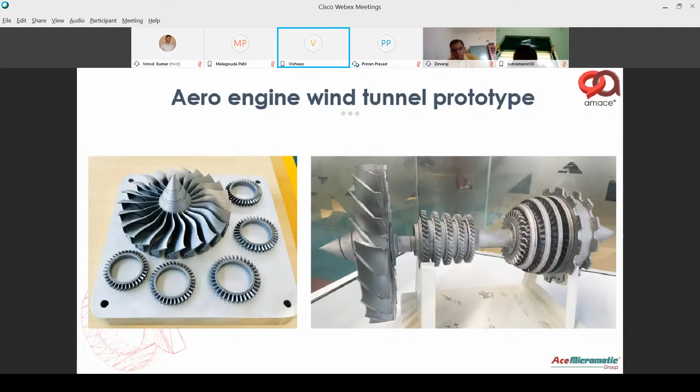The next slide will show you we were a part of the Chandrayaan-2 project, wherein there were 3 parts. If you all remember, there's a lander, an orbiter, and a rover. The rover is basically an AGV which comes out of the lander, and which was supposed to go all around the moon, collecting information from the moon surface.

Unfortunately, the lander did land a little too hard, because of which the rover could not come out. But nevertheless, there are many 3D printed parts made in India by ISRO sitting on the moon surface. So we are not very far behind the other developed countries in adapting newer technologies. We did this in 8 hours—imagine printing India's signature to be taken on the moon in less than 8 hours' time. That's what technology has brought us to.